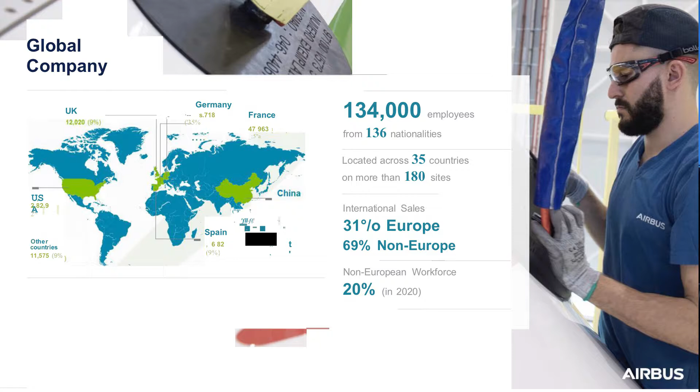We are now a truly global company. We operate final assembly lines on different continents. We have a footprint - engineering, manufacturing, supply chain - all over the place. Our international sales, of course, didn't wait for that. They were much before us, very international, but we now have 20% non-European workforce. And by the way, this is accompanied by the fact that the actual board and structure of the company has included many more international, outside-Europe persons around the table.

Airbus is at the forefront of the aviation industry. I was lucky enough to be part of the team in the advanced project when we did the A3XX, which became the A380. Never mind some of the local difficulty to attract more market, it will come back.

Those firsts, fly-by-wire for example, and guess what, we are still very aggressive to go forward on innovation. We'll come to this in a minute.

Some numbers here: 54,000 employees, 50 billion revenue. So yes, it is a big chunk of our overall company, but it's very cleverly integrated now, with commercial aircraft making a solid base for the other two companies to grow.

We delivered 688 last year and we met all our commitments, which was outstanding. And when I say we, I don't mean Airbus alone, I mean we, the supply chain and Airbus together. Because without a properly managed set of suppliers managed by all of you, we would never have made the deliveries. So thank you.

Our beloved helicopters, so beautiful images always. I think you shared with me some of the images in the film, just great. So we are the number one helicopter manufacturer.

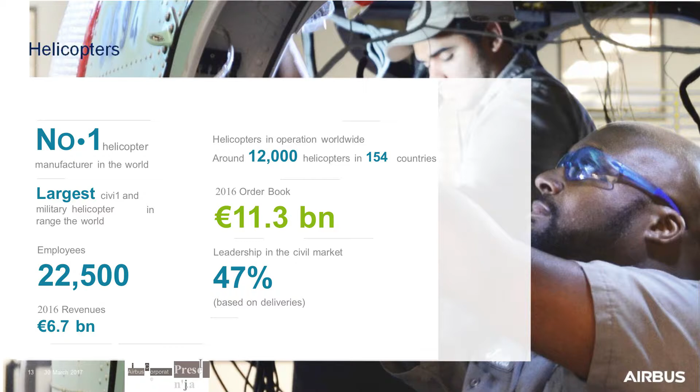Last but not least, the third pillar of the company: defense and space. Of course we have the famous A400M, a little bit too famous in the press, I should say. It's outstanding capability, unique in the world. It will make its way to the market ultimately, even though we'll be suffering sometimes, but this is like any program. We are very ambitious with the technical capability of the aircraft, and we are about to meet each and every one of them.

2,000 aircraft orders, and number one European defense company with 11 billion as well. So a very smart move from Tom Enders to make a company with a much leaner setup, extremely powerful, and we're looking forward to the execution of it.

So in a nutshell, the portfolio goes from commercial aircraft to helicopters and defense. And of course, a deep dive on the families of aircraft that are pulling the demand, especially in titanium, and we'll come to this in a minute.

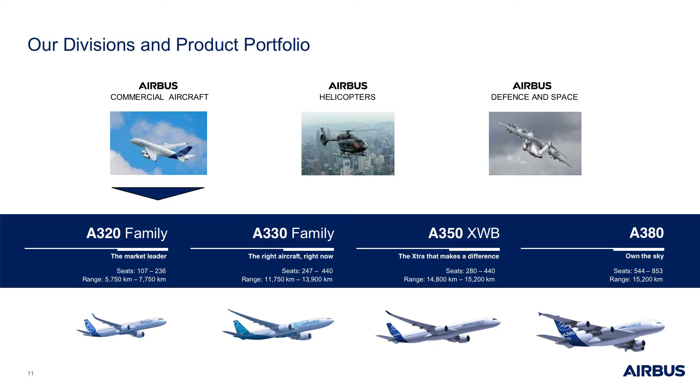Four families: the 320, transitioning to the Neo family, and we'll see what it does to titanium volumes. The 330 family, which has enjoyed an interesting Neo, new engine option topic, revamping the aircraft and giving it a fantastic second life. The 350 itself, a flagship for our long-range aircraft, and the 380, unique in its domain.

Innovation. I think we've seen from our partners at Arconic that innovation is something we share with key partners, and in this case they unveiled a little bit of the additive manufacturing development we do with them.

Here you see a picture of a bionic design. The picture is not new, I've presented it before. What is new is that we are accelerating our progress on those developments. We are confident there are extremely interesting candidates across the 500,000 parts that constitute an aircraft. We will find the right materials, the right parts to constantly innovate and bring in less cost, more reliability, and it's a fantastic avenue for us as an OEM and for you as suppliers.

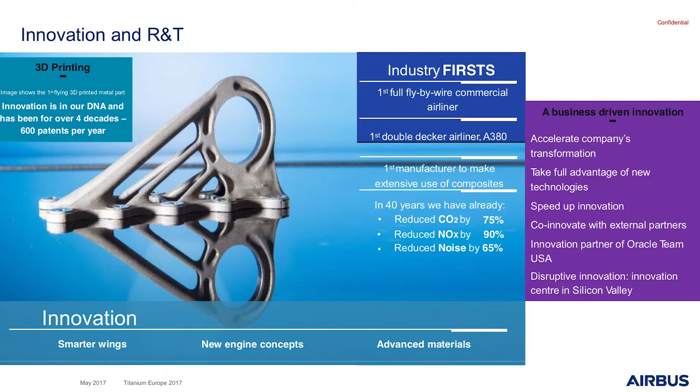So much for the company. What's in it for us in terms of procurement?

Impressive numbers. If you look here, the way it's shared, we've got roughly a bit less than 10 billion worth of procurement in what we call general procurement. So we buy telephones, engineering, buildings, and CapEx. CapEx, of course, our industry is hugely CapEx intensive, it takes a few billion for each of the new big aircraft programs. So this is general procurement.

It's across the group, so in terms of industry we are very much standardized. There's no longer a single guy in a corner saying, I'll buy for myself because I'm a small business unit of the big group. No, it is well organized. One guy buys for the others, it's a lead buyer concept, and it's a concept we enjoy also in raw materials, particularly in titanium.

In terms of the rest of the demand, we have a bit less than 30 billion for Airbus, 5.4 for space, 2.6 for the helicopters. Overall, this is the volume. How does that spread? Bear in mind that in the 26 billion for Airbus is a big bulk of what is then spread in the supply chain.

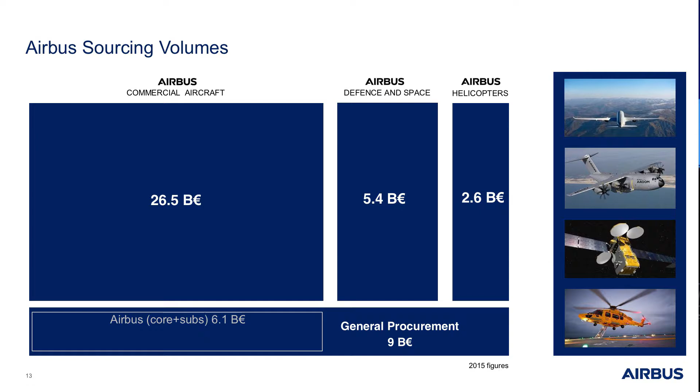In the enablement process, we buy materials, for example fasteners, and make sure our partners can benefit from those contracts. The spread is here: roughly half of the procurement turnover is propulsion systems, structure and airframe is 20%, production material is 5%, and system equipment is about 12%. So this gives us a view of the overall volume.

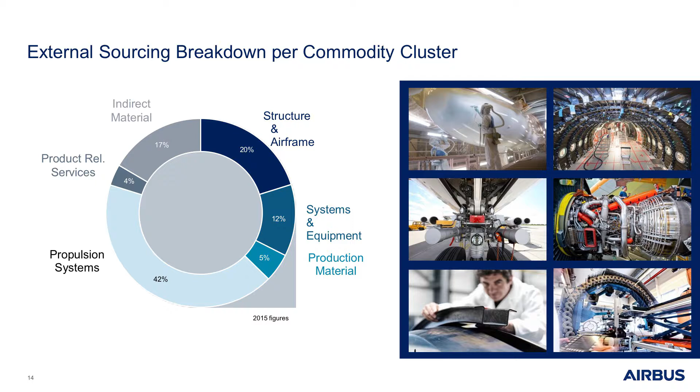When we talk about raw material, aluminum, titanium, we are within, let's say, a little bit below the $2 billion figure. Still procurement and procurement strategy. So what's in it? What are the expectations from an OEM like Airbus?

I've reshaped the chart to make it a bit newer, but the message is still the same. To me, strategy has to be consistent. You don't change strategy every second day. What changes is probably the actors, the steps, or how close we are to the target. So none of those can be questioned. I think we have the luxury to engage each and every of our partners into those.

When it comes to sustainable competitiveness, this is all about making sure that every day we look at means and ways to reduce costs, to avoid cumbersome weight of material when they don't need to be. Walking across the hall this morning, I came across at least three people already speaking about that subject. I'm very happy that theme is extremely present, and we have made a success on that. Supply chain de-risking, no doubt.

I skipped some charts, but my predecessors have explained that the demand in the aeronautic industry is huge and ramping up. It means that with somebody like us having about 8 to 10 years of order book, it is absolutely essential that we deliver on time and quality each and every airplane to all customers. It is essential because the top line is done - we've sold those airplanes. So all we can do now is make sure we deliver them, have repeat buyers, and deliver with the best possible margin for the industry.

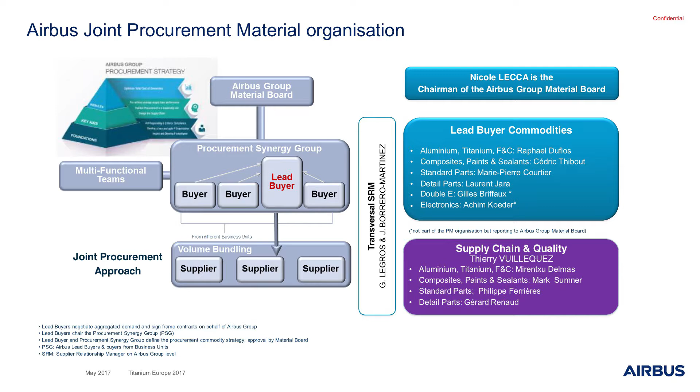We do, by the way, with Thierry Vuillequez, who is known by many of you, have the intention to strengthen the supply chain and quality side of that activity so as to maximize our ability to finish the job. That means to measure on-time, on-quality delivery across the various supply chain consumers of our contracts.

Another key element of our operational strategy is enablement and CONBID. CONBID is the means to collect bottom-up all the needs from the supply chain, giving us the demand for a given year. That CONBID is then transmitted to the mills. Airbus, my team, negotiates with the mill the proper allocation of where what gets delivered across the next year. We then make sure those are well channeled with the help of the mills and the respective quality and supply chain people. Very, very efficient process.

It has been greatly improved by means of digital tools. And the enablement process, on top of CONBID, is simply to make sure that when I have a contract with Spirit delivering a work package, Spirit may enjoy the titanium of my contract by means of enablement. That means I ask VSMPO, I ask Arconic, do you guys agree that Spirit could take a chunk of that contract for delivery of that work package? Everybody's happy. We have a triangular agreement which allows Spirit to operate my contract for the benefit of that work package. Very simple. And in fact, we keep having more and more of those, and this is the vision.

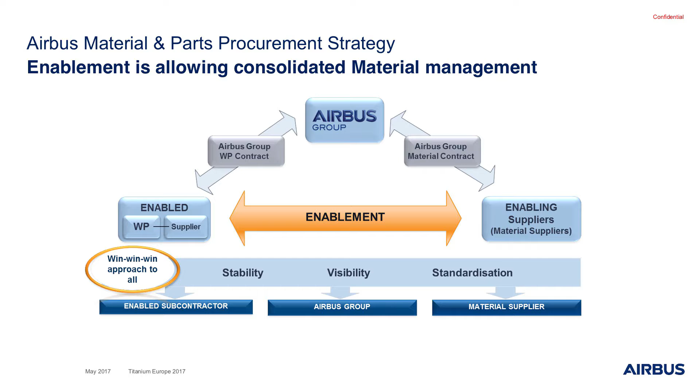Airbus, as you know, has made spin-offs, Stelia, Premium. Therefore, we have less and less manufacturing, and we concentrate on strategic matters. What is strategic? It's to ensure long-term and sustainable titanium supply in the supply chain. Where is it supplied? Across the supply chain. Does Airbus have a word in the PO placement? No. We need to make sure the PO stays local, while the strategy stays at the level of Airbus.

Challenges of our supply chain out of ramp-up, globalization, customization and innovation - I would just keep two: ramp-up and innovation. Ramp-up is, of course, a key challenge for us, because we shall not miss any of those deliveries. Of course, as you know, having an 8-year backlog is good, and it's also secure for you as partners, but it's also a little bit cumbersome. Imagine you go to the car dealer and say, I want that Mercedes here. Come back in 8 years, guy. Wow, it's a bit tough. So, of course, the demand, the industry is asking us to ramp up, to swallow a little bit quicker the backlog. So it's a good balance between capability, strategy, market demand, time to market.

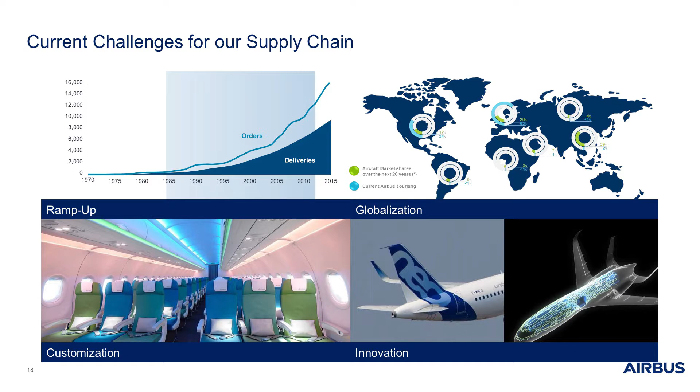So this is one. The second one is innovation. Constantly innovate to make sure that we don't become the next Kodak of the planet. We need to be there collectively, and this is important - it is not us alone. You guys have lots of great ideas in manufacturing techniques, in alloy development, in whatever it takes. I can give you one example which wouldn't come as obvious.

We are developing brain cube discussions, which means Airbus and some of its supply chain share threads of information on qualification, on testing. We take all the data from those and manage to do predictive qualification. We manage to drastically improve and reduce the lead time for change, etc. This is an improvement coming from digital tools and tight collaboration between the parties.

The titanium demand, third part of my presentation. So we are in the core of the title—what's in it for me, Airbus Group? Every day, in fact, we process more than 30 tons of titanium, to be precise, in the north of 30 tons. So it's a huge number.

Second, I've read my predecessors, and I would confirm each and every number presented when it comes to civil. Defense is a bit more difficult. So on the civil aircraft, we confirm, and in particular, even though these are not the same metrics and the same time frame, when you look at an A350 compared to the A330, we talk about 18 times the amount of titanium. It's a huge, big difference.

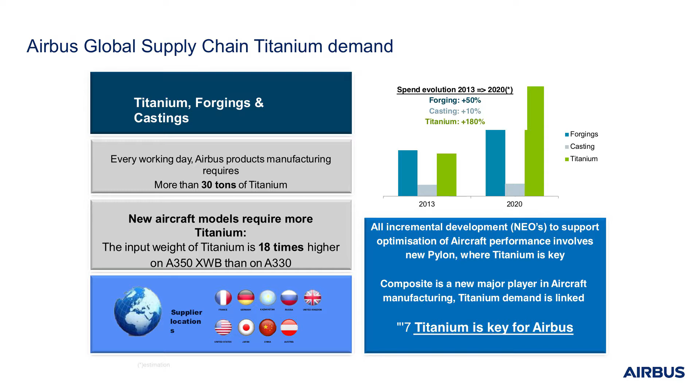If we take spend evolution—spend is interesting because it's a combination, and I really like one of the charts presented this morning again—we confirm there is a ramp up of airplanes, but we also need to drastically improve the input weight. Vertical integration, buy-to-fly improvement means that while I grow the number of parts, work packages, and airplanes, hopefully I'll be more clever and allow for new design, new manufacturing routes that drastically reduce the amount of material we waste on an airplane today. So it will be a good battle between ramp up and also continuously challenging the design to decrease the amount of material wasted, not needed.

Incremental developments, I said that earlier. The Neo is all about new engines, the configuration of those engines, and the particular setup of the pylon fitting the engine to the wing, which has enjoyed a drastic improvement from the previous generation to the new generation. And it goes with a huge increase of titanium use—good for us as a community, and you know exactly why. In parallel, the fact that titanium is a very good player with carbon makes the A350 another beloved trend for titanium. The people on A350 have been extremely focused with us to understand the trend of titanium, because they will very soon become the number one consumer in Airbus.

Titanium is key for Airbus. Titanium pricing is absolutely critical, but titanium sustainable availability is also key. And we know that we have lead time issues, resource issues—all of this has to be tackled. We'll come to this in a minute.

What is the sourcing strategy in a nutshell? I'm trying to resume about 30 slides into one. First and foremost, very simply, we need to deliver—deliver on commitments. This is about a stable and robust supply chain. We will continuously monitor capacity, we will monitor your ability to run continuous improvement, to make sure at all times that we monitor the blood pressure of our supply chain when it comes to delivering titanium.

Second, we need to boost competitiveness. We cannot stay where we are—somebody that stays still is dying in our environment, because everybody moves so quickly. So competitiveness is an everyday challenge. We will investigate every opportunity to get to the total cost of ownership. Sometimes we may take a bit more titanium because it will improve the overall cost. Other times we will reduce the input weight because it will help the machining or the casting, etc. So we will look at it with a global view.

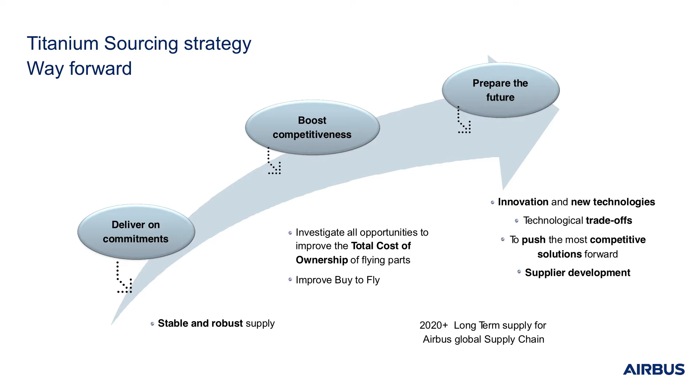Buy to fly is the key word in this context, and our engineers, our manufacturing engineers, are in community with us to try to find ways and means to invest into long-term solutions. As we prepare the future, of course we have to innovate—new technologies, 3D printing, and some extrusions that are going to be competitive to forging the plates. Some additive could be placed onto some plates, so linear friction welding, and so on and so forth. We will push for the most competitive solution in terms of manufacturing technologies. Supplier development will also be a key strategic intent to make sure that the good guys stay tuned with us and dynamically grow with us.

The elephant in the room on that chart says long-term supply, 2020 plus. What does that mean? It means that a few of the people in the room enjoy the existing long-term contract of supplying raw material, titanium raw material, with Airbus. The contract will expire at the end of 2020, and we are embarking onto discussions to create the environment for the next generation contract. We'll come to this in a minute.

In that section, I would like to give you some examples of why we have articulated our strategy like this. The first one is deliver and commitment. I don't think I need to dwell too much on it, but I just want to give an example. If I compare, in the commercial aerospace domain, the number of aircraft that I used to do in 2011—I take a single aisle equivalence, so if I take a big, large aircraft, it's probably 10 single aisle equivalent, etc.

So that type of conversion. If I compare 2011 to 2018, I have a... to 2016, I have a 71% increase. And then, as you could probably see, we have plus 15, plus 9, plus 17 every year.

So it's a steady state growth which needs to be sustainable, and we need to adapt to it, because as you probably know, it's a combination of programs for which we will see some growth, substantial one, others with whom we will have some declining activity. Of course, transitioning: if you go from a NEO, from a CEO to a NEO, there's a transition that has to be managed.

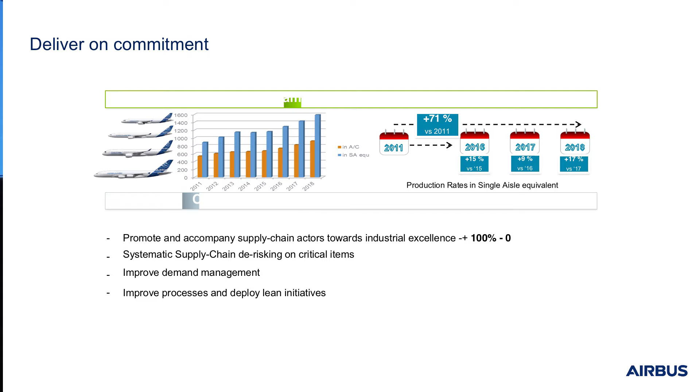There are only two numbers that we need to remember: 100% on time and 0 defect. How do we do that? Not by sweating and being like a SWAT team every day, proud every evening to have saved the world. It won't work, it won't last.

We need to have sustainable systems, including digital support, that will be there to last. So can it be a vendor-managed inventory? Can it be some dedicated information system? It's a sum of all this, all in the mind to team up with Airbus to meet those 100-0.

By the way, many people in the room and in our supply chain are already at that stage and enjoying some extremely good business growth with Airbus. By the way, I don't exclude Airbus from that growth and from that improvement domain. Demand management is on our shoulder, and we are trying to improve every day.

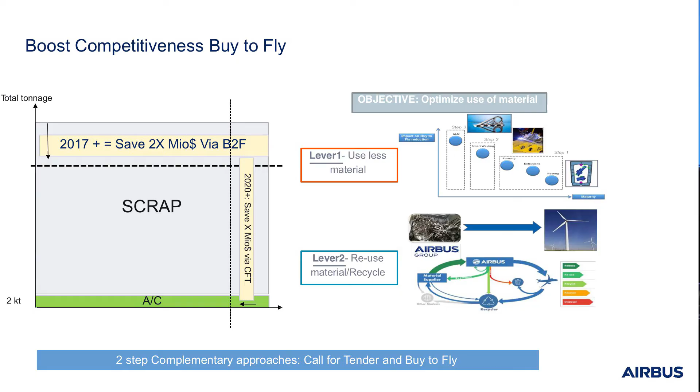We have, on the top right, let's say, a chart that tries to depict an axis of maturity and complexity. Of course, when we do 3D printing, we pride ourselves to think that this is probably the best efficiency, although the maturity is not yet there. However, on the right bottom side, we have - nobody prevents us from being a little bit less stupid.

So when you have a little frame like this, and in the middle of which used to be a solid thrown to the bin, why don't we use that solid to do some more parts for our supply chain? It may look simple, takes a little bit of supply chain and logistics, although in this particular case, you get the center part doing parts for free. Here, you improve dramatically. So it comes from very simple to much more technological areas, all of which result in dramatically reducing our buy to fly.

I guess we have a lot on the menu here. So I'd like to share with you the last one, at the end of my presentation. I have with me today one of my famous team members, Thomas Cochelin, who many of you know. Thomas used to be the lead buyer for titanium, and you will see at the bottom of that slide that we have created an ALM, additive lead buyer position.

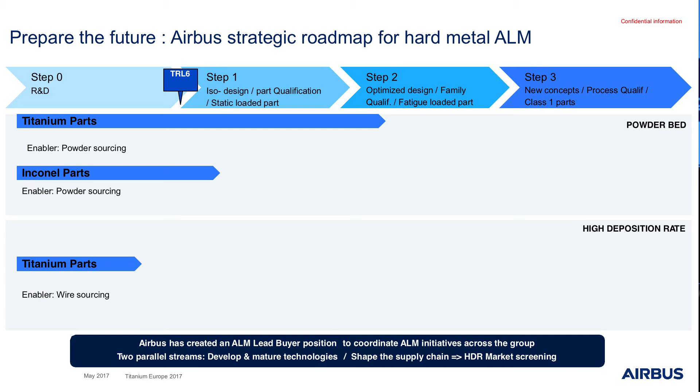You will enjoy opportunities to work with us on those avenues, and we will gradually grow our mutual understanding to make sure that this becomes a sustainable business for our industry. A very interesting avenue here that matches innovation, cost reduction, and potentially supports de-risking the ramp-up, etc. So Thomas Cochelin is now the new ALM lead buyer, and you will be happy to meet him at the break if you want.

As a conclusion, no surprise, you see my best friend, the A350. Even though he's carrying a lot of carbon here in that picture, you know he's your best friend in terms of titanium content. So 350 ramp-up is definitely a key driver. So watch the news, look at the rates, and look at the Dash 1000 first flights and everything.

It's a growing opportunity for those of you that will follow the rules, that will be on time, that will be in the dynamic. Airbus and the supply chain, not Airbus only. So us as a team, we have a unique opportunity to set up partnership to deliver this strong ramp-up.

And for me, I would stress out 4 key elements. First, improving the use. Titanium is rather expensive, let's make sure that we use the best of it. Sustainable industrial excellence, it is not yet there.

I cannot sustain anything else but 100% on time, and we will do it whatever it costs. It's going to be there as a team. We'll have to be there, and 0% defects. So it's a common objective.

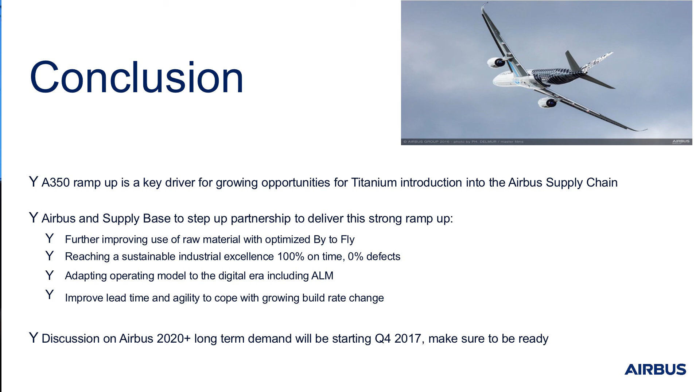At the end of which, the discussions on the 2020 plus contract are already started, and some formal demand will be starting to come out of my team in Q4 2017. So I guess I want you as a community to be ready, and I hope that I've been clear enough during that speech to give you each and every element to be ready to meet our demand. Thank you.